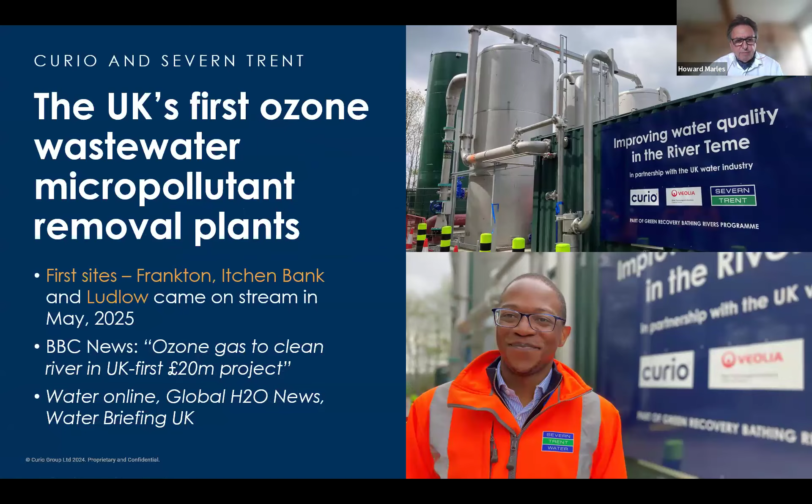More recently, there was an opening, or should I say a ribbon cutting, at Ludlow, where we were invited to attend, of course, and Wilf, who you can see from Severn Trent, gave an address. The BBC were involved, and basically it was more of a PR exercise to explain what Severn Trent have been doing and what we have been trying to achieve. So Severn Trent were pioneering.

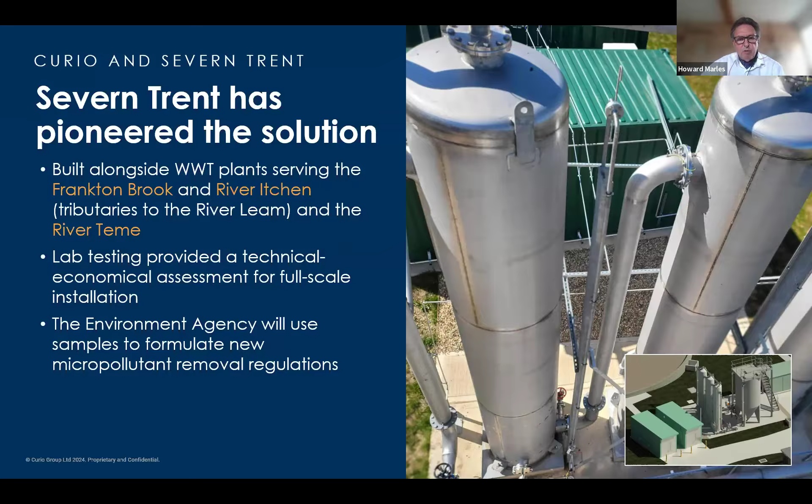When we talk about these plants, we're talking about them as a pilot plant, but in point of fact, they're actually testing the full flow. Full flow will go through these. Normally piloting will start with the lab test, as you can see on here, and then from there you would go into a more live project, probably 7 to 10 cubic meters an hour. So these are actually very large pilot plants. And we've already been told by the Environment Agency that they're interested in the results of what we can achieve in this removal process using ozone.

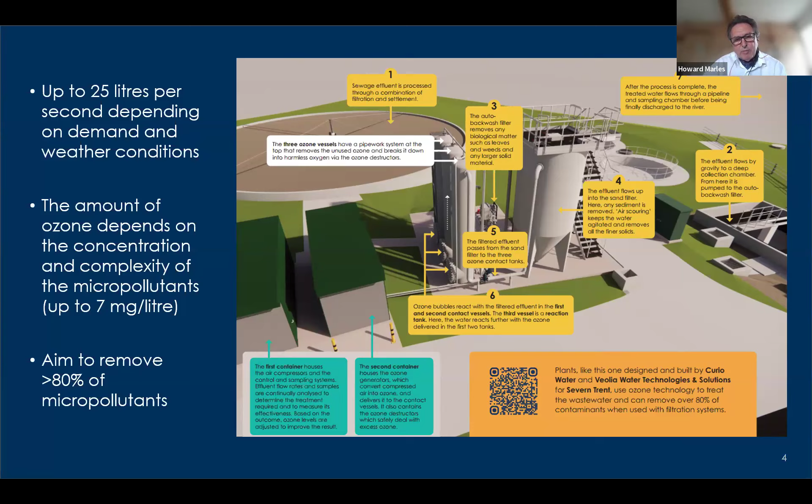So this is a very idiot's guide, as we call it, to the process that's happening. And this one actually is at Frankton, so you can see from the labels. We start with the effluent being processed all the way through the TSR plant, through the backwash filters, and then on through to the ozone, where the ozone is bubbled in. I'll talk about more of that as we go through this presentation, but that's not that unique just to Frankton, to be honest with you. Some won't have TSR plants, but this one actually does.

So I think the starting point has always been, where is the problem, what should we be addressing, and why has it come about?

So the green recovery was a directive from the government where they realized that over all this time we've actually polluted a lot of our rivers, and they're saying here that probably 90% of our rivers are polluted, not just with effluent, but with micropollutants, which we term the silent killer. They're the things you don't see. The sewage you see, this you don't see.

So Severn Trent engaged with ourselves, Curio and Veolia, to design and build the micropollutant plants, basically in line with what was happening in Europe, because we'd already had 8 years experience in Switzerland on similar systems.

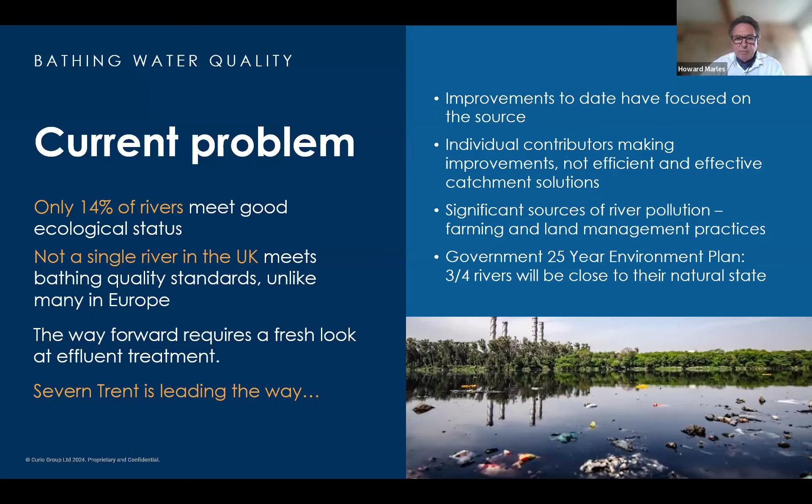So why is it important to have them? Well, a lot of these would be pretty obvious, although we perhaps don't discuss them enough. Healthy rivers support a really good ecosystem, biodiversity, communities, and the people are using them to swim, to boat, to fish. So healthy rivers for health and well-being.

During the pandemic, there was a really big issue where people were using the rivers for swimming and a lot more sports, and they were getting a lot of gastric problems. So the cost of having unhealthy rivers is really quite high.

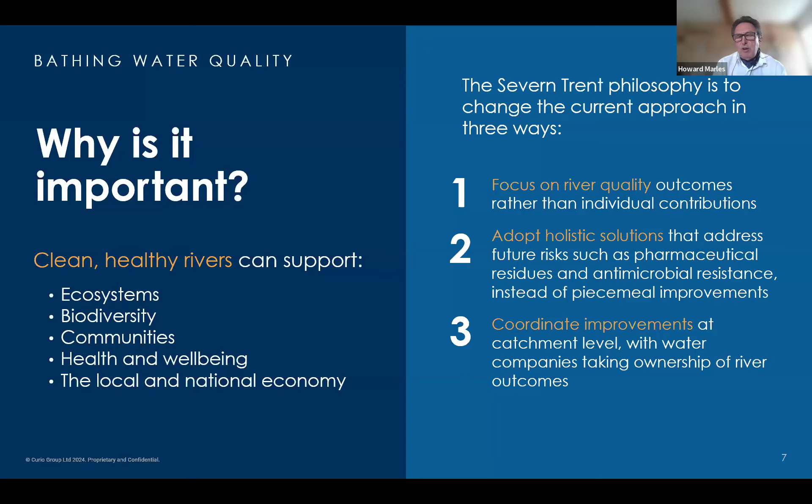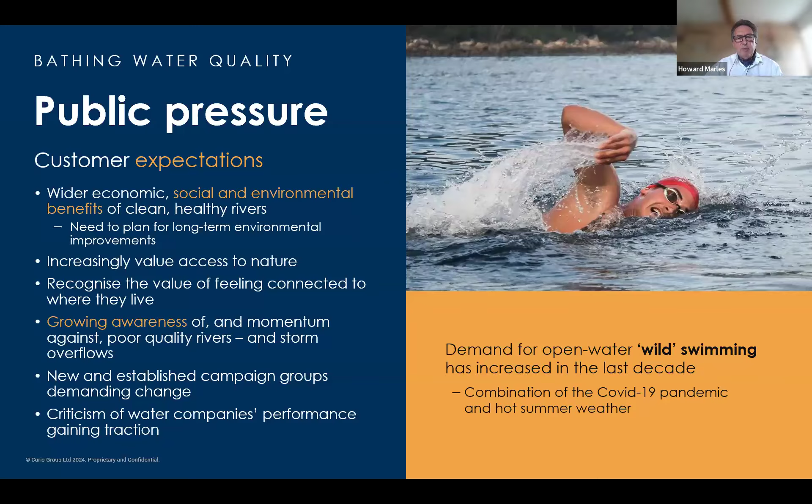So of course, public pressure now, and I think we're all fully aware. We as the water industry are in the news on quite a regular basis. The majority at the moment is to do with sewerage and the overspills and outspills, etc. But it's becoming more and more prevalent because it's in the news more. So the wider economic and social benefits of having clean rivers are now in the public eye, with growing awareness. So the demand is becoming more and more on the water companies to do something about it.

So bathing water quality. This is the directive that came out from the government. The objective was to have an investment program to deliver specific improvements to get our rivers back to a healthy state. Meeting the biological standards, improving against chemicals.

Now, when we say meeting the biological standards, there are no regulations in place currently for micropollutant removal. We do it with pesticides, we do it with nitrates, etc. So these rules, regulations and standards will be coming. They are definitely following Europe.

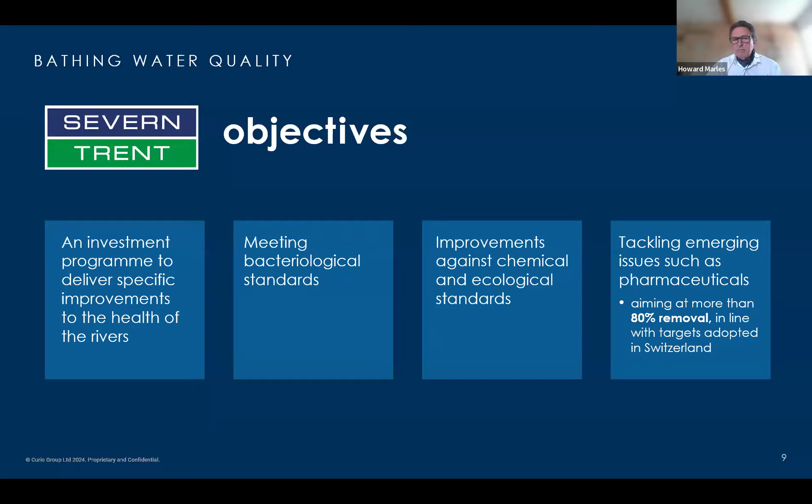So the objectives of these projects, right from the onset, were really micropollutant reduction and disinfection. To get to that point, we have to go through a design phase to understand what we need to do.

So we proposed a solution using ozone, which is diffused into the system. The reason we used ozone is because it's an absolutely brilliant oxidizing element to remove micropollutants. And there are no byproducts after this part of the process, because the ozone reverts back to oxygen, so we don't have residual traces going back into the rivers.

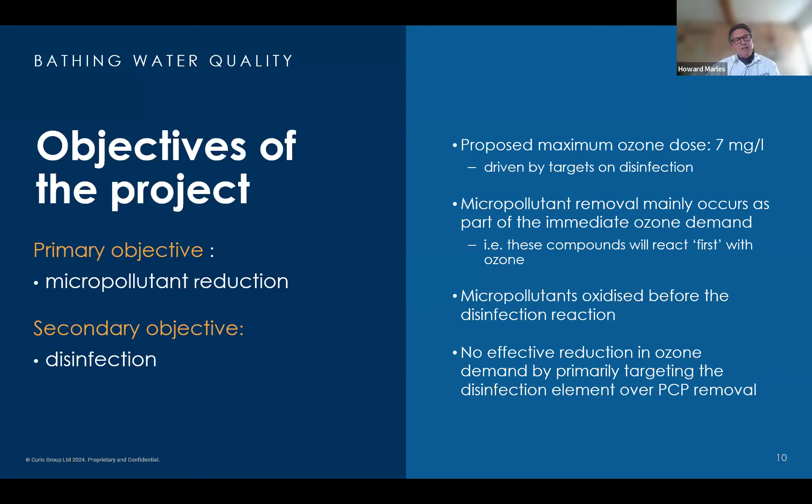So considerations we had to make: first of all, flow to be treated. We knew that Ludlow was in the region of 500 meters cubed an hour, Itchen Bank pretty much the same, and Frankton a lot lower at 7. So we were designing systems with quite a range of flows, and these are peak flows. As you'll probably be aware, there are extremities with bad weather flows, so we have a lot more than peaks to handle. And then there are times when we have quite low flows.

So taking that into account in the design was quite significant. And the properties of the water being treated. And then we had to ask, what would be the consent parameters? What do we target? How much are we going to remove? And what kind of systems do we need to design to take into account all of these different parameters? The calculation is on the right of the screen, so you see it was quite intense.

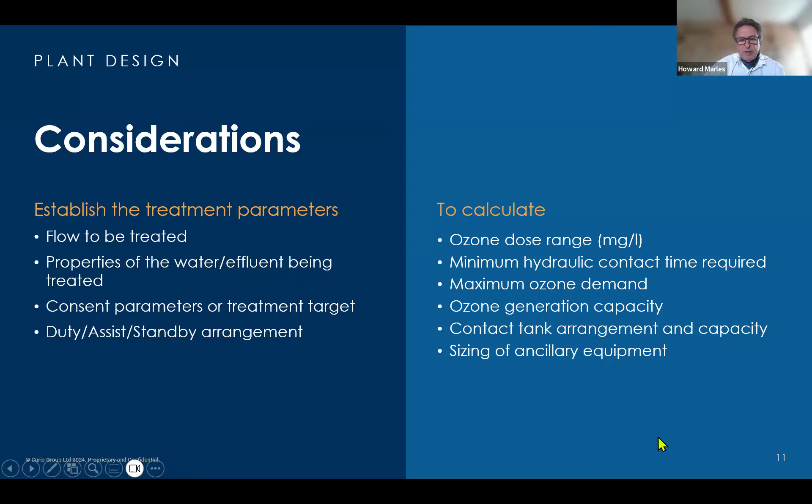Using ozone in wastewater, you're faced with a couple of issues. One of the main issues is if you have too high a concentration or dose of ozone, the risk of forming bromates is really quite high. So you have to design a system to try to mitigate that. So you need as low a dose as possible, but you need a dose adequate enough to do the job that you need it to do, the oxidization.

So the way that we designed this, or tried to mitigate this through our design, was to introduce the ozone at two different stages, and then to diffuse it in and to control the dosage, measuring at the beginning of the process and at the end of the process, so that you optimize the dosing points, but you mitigate the risk of forming bromates.

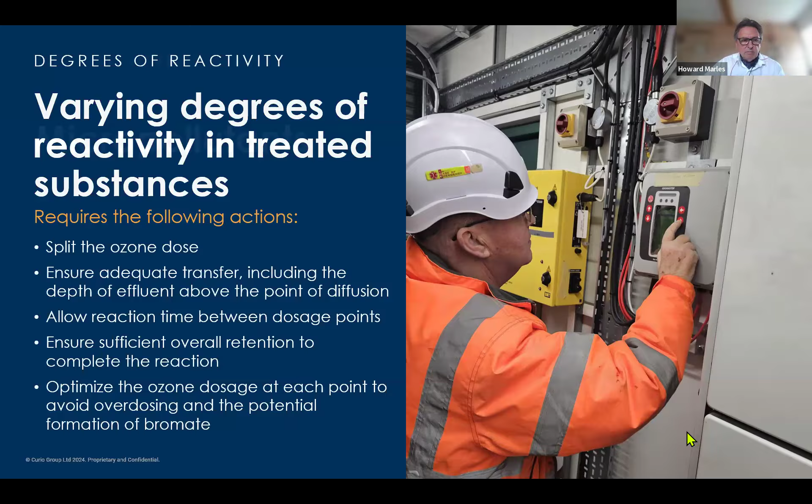So I guess it would be good to say a few things about micropollutants. What are they basically? So they're synthetic substances that originate from anthropogenic activities and appear in small concentrations, less than several micrograms per litre, in our natural waters. We get them from industrial chemicals, pesticides, pharmaceuticals, and hormones, which of course are domestic.

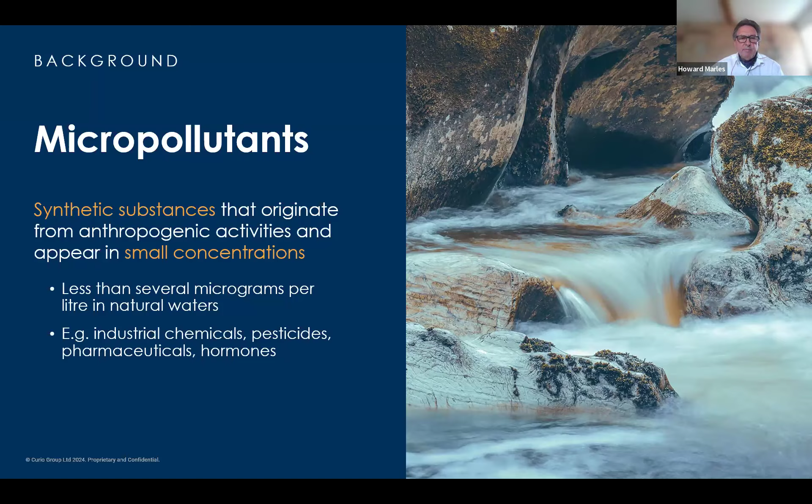I guess the problem we're going to be faced with is that, as of today, we understand the micropollutants that actually exist and need to be treated. But this is going to be a moving target. As we speak, we know already that more pharmaceuticals are being developed for people to have longer lives. So a lot of these contaminants actually are emerging concerns. So when we design anything, we have to design it to be future-proof.

So the starting point of this design was actually just using ozone. Since introducing the ozone systems that we have, other treatments are now going to become more useful, and we need to design them into this system. We'll talk about it in a little while in this presentation, the opportunities that are going to be available to us to not have one process, but to introduce several processes.

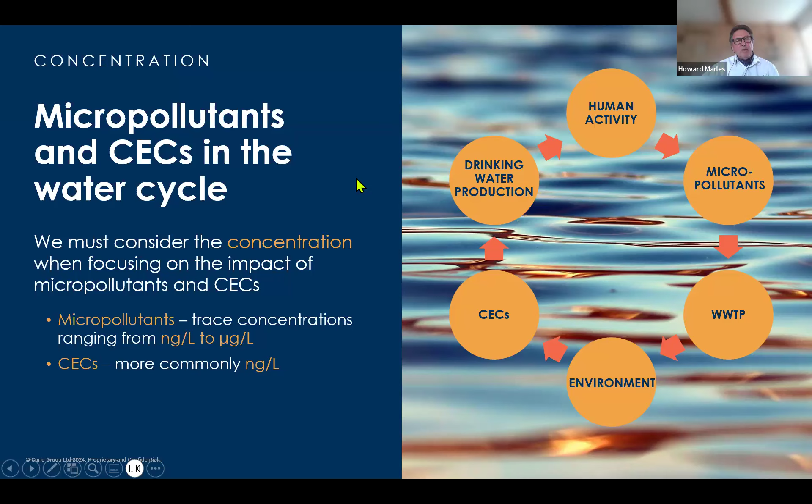I'm sure most of you are aware of this and the sources of them. We talk about micropollutants, but when you look at it at this level, there are 110,000 registered substances in Europe, which is a huge amount getting through to our wastewater system. And about 200 to 1,000 more are being identified each year. These are built up from chemical products, pharmaceuticals, cosmetic products, heavy metals. So they don't exist as one item. Designing systems to eradicate or remove these is quite a complex process.

So why use ozone? Ozone has been used in water treatment very widely for a number of years. In fact, we were building plants in the UK on drinking water some 20 years ago. They're great for killing algae, oxidization of micropollutants, oxidization of iron and manganese, which is quite a well-known process in drinking water. Bacterial disinfection, and it improves taste and odour. A lot of the water plants used it for colour and odour, colour in Scotland definitely, and odour in the north of England, and of course pesticide removal. So we have been dealing with micropollutants for some 20 years, because pesticides are a micropollutant.

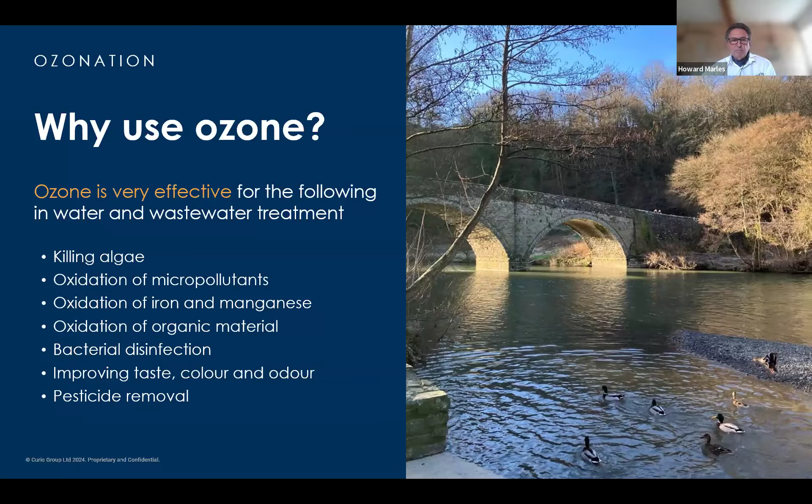So ozone and the reactivity of the micropollutants. It's the nature of the target compounds and the speed of reactivity with ozone. One of the issues we're faced with is that the suite of micropollutants we are trying to treat will all react at different times. Some will oxidize relatively quickly, some need a longer contact time, and then you've got some which are a bit more like the benzenes.

So we've got a bit of a technical issue, so hopefully Howard will join back again. He looked like he was taking his headphones off, so hopefully he'll be back very shortly.

Okay, I will get back to where Howard was. Let's see when he dials in. Let me just get the screen up and share from there. 1 second. This one should be it.

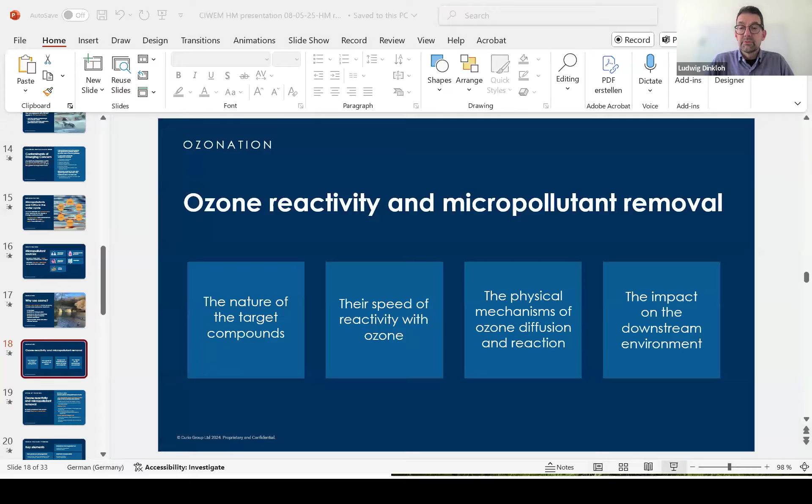Okay, I think we were here with the ozone reactivity and micropollutant removal, obviously with the cocktail mix.

Let me just move it over. What happened now? Andrew, I see you. What happened here? Let me just do that again. Sorry, now we have some issues. I can see your screen and I can hear your voice. Okay, good. There we are.

Since we have a cocktail, we need to look at the individual micropollutant contaminants regarding their speed of reactivity with ozone, then how we diffuse, how we get the ozone gas into the effluent, and how much reaction time we give to each component. And then there's obviously an impact to the downstream environment. What have we actually oxidized? How is that treated? So the overall ozone system approach is to be very carefully evaluated.

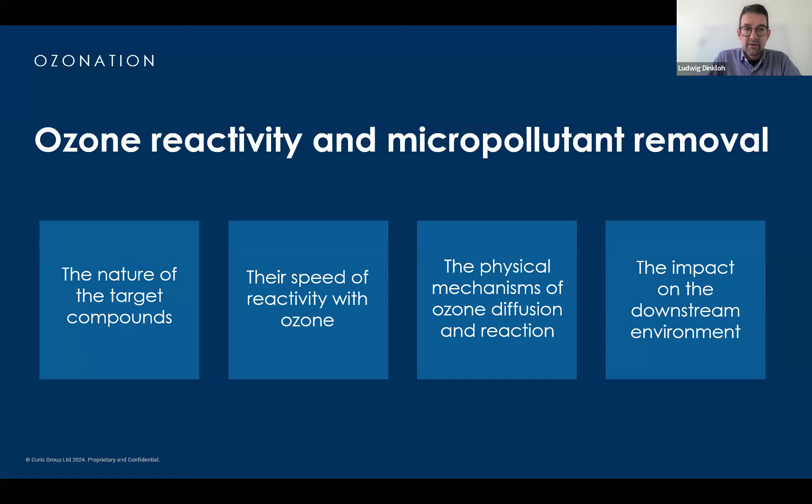And there are different means of injecting ozone into the effluents. We have very fast reaction time when we use very small bubbles, so that is fine bubble diffusion. But we introduce this against sufficient hydraulic head. So typically, as you have seen on the slides from Howard, we have large columns where we have a water layer of 5-6 meters.

Then the reaction time, how long are the micropollutants being exposed to ozone? We are talking minutes, not hours. And for some fast reacting components, we can even do that in seconds. But the typical reaction time, if it's ozone only as an oxidant, is in the range of 10 to 20 minutes. And obviously we have to look at the hydraulic depth again and the water pressure.

If we have slow reactions, then we have to make sure that the ozone is dissolved consistently in the effluent, and again have sufficient hydraulic retention time without dead legs, etc., in the reaction tank. So there are quite a few things to be taken care of when you look at the ozone treatment process.

Somewhere we need a gas containing oxygen, part of which is converted into ozone. Typically, it's LOX, liquid oxygen, or compressed air. If it is LOX, which is basically pure oxygen, you want to add a bit of nitrogen for the reaction, so the ozone generation is stable. The ozone itself is generated in a separate reactor outside of the effluent that is powered by electricity, so you need a power supply unit. The generation of ozone produces heat, which needs to be taken away, otherwise we lose the ozone again, so cooling water is needed, and obviously flow and pressure control.

Then once we have the ozone, and it's never 100% ozone, you're talking a percentage of ozone in the gas flow, let's say 10%. This 10% ozone containing gas, the rest being oxygen from the LOX tank, needs to be put into the contacting vessels, and we need a diffusion system. You can't guarantee that 100% of your ozone is consumed by the effluent, so you always need a safety measure for the excess ozone. That is an ozone destruct unit, so you need off-gas pipework and ozone destructors. And in the end, you need to control the whole thing.

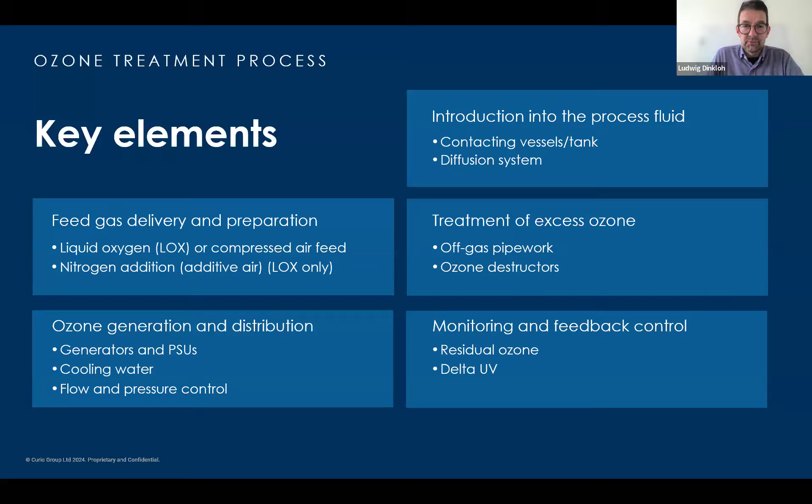How much ozone do we actually add, which is not just a matter of flow rate, but you want to measure residual ozone. And one interesting aspect that came out of the work in Europe is the measurement of the UV absorbance before and after the ozone addition, because the ozone attacks the double bonds, which are typically in the micropollutants, and that means with the delta of the UV absorbance, you can actually measure the performance and control the ozone amounts that you are putting in.

So here you can see graphically what I've described regarding the setup, which is also the setup for Severn Trent. We have the air inlet for the instrument air feed and the nitrogen addition. So air is added to the LOX tank, the oxygen feed gas, to provide the nitrogen amount needed for a stable reaction. We have the two generators here in violet, which also receive cooling water.

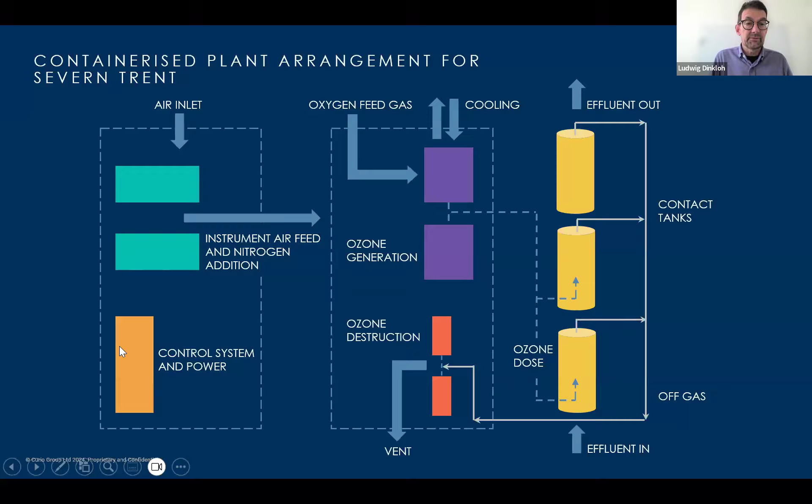From there, the ozone gas goes into the contact tanks. The off gas is collected from the contact tanks to be treated in the ozone destruction units in bright red, and the treated effluent goes out after its retention time passing through the contact tanks. And in orange, over to the left, there is the control system and power station.

So, well, okay, Howard here is not back yet, right? So I continue, because Howard, you can jump in any time, because I'm actually representing the partner of Curio, Veolia.

So that's really Howard's Curio story here more, because they've headquartered now in the Cranfield campus, where there are more trials going on with Cranfield University. And Curio actually will be putting up multiple pilots to test the combination of multiple micropollutant processes to be able to flexibly test subject to the requirements of the utilities and also to upcoming regulations that may be faced in the UK.

So ozone is obviously part of this one. There is granular activated carbon and powdered activated carbon, advanced oxidation with also UV, MBBR filtration. I will explain that also in full-scale plants a bit later. So this will be accompanied by laboratory scale trials, so that whoever wants to really test his or her effluent has a very good means to see what is the best combination regarding CAPEX and OPEX and carbon footprint for the particular effluent they want to test.

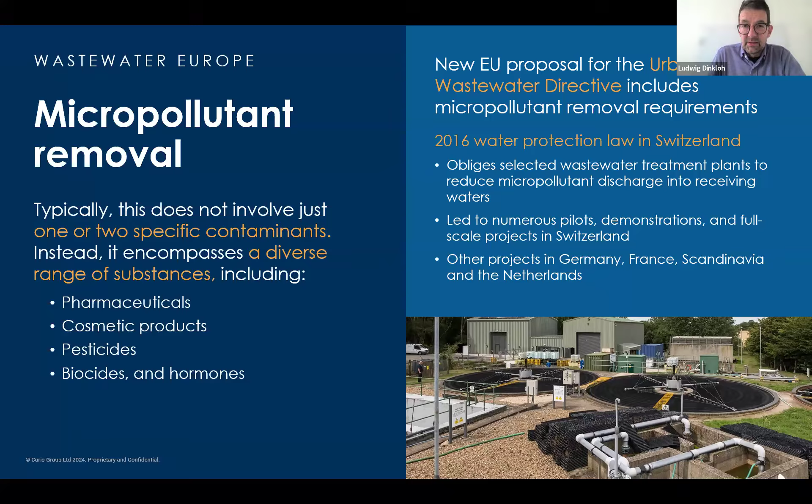From there, it has grown into Germany, France, Scandinavia, and the Netherlands, because it was clear that the European Union also will regulate this, and the Urban Wastewater Directive now requires micropollutant removal for European Union sites as well. This is shown on this slide, what that means. So the large plants, with a population equivalent of more than 150,000, will need to have this so-called fourth treatment step, 100% by the end of 2045, which is 20 years from now.

But as you can imagine, with all the planning cycles, investment cycles, etc., 20 years can quickly pass by, but it already has started. By 2033, 20% of the big plants need to have this fourth treatment step. The smaller plants, not all of them, but those that discharge into declared environments that would have a risk if it's untreated, so sensitive environments, there you also need to start treating, and that means also smaller plants will see the fourth treatment step.

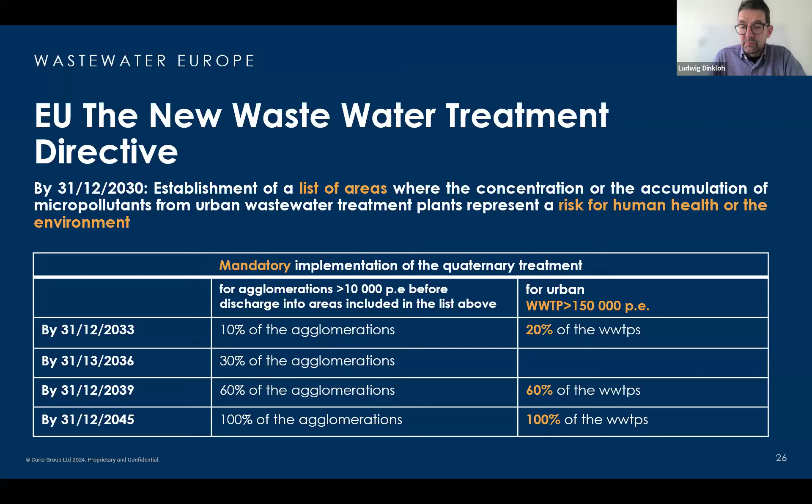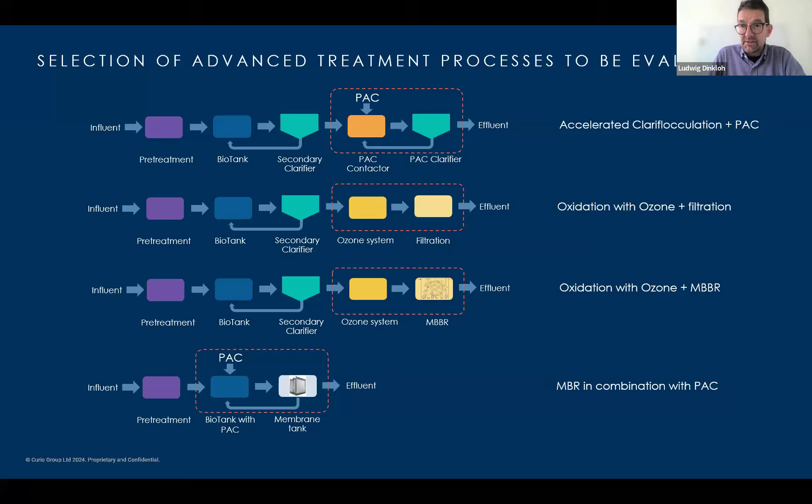And as you could see from the pilot setup from Curio, there are definitely a lot of different treatment processes. I will just highlight a few here. Let me just open this up. So you have, for example, powder activated carbon added as an adsorptive means. We can work with ozone plus a sand filter or an MBBR downstream. And if you go even further by upgrading your biology from conventional activated sludge or even older technologies, we work with an MBR system. One solution that has started to see full-scale operations is a PAC-MBR combination. I'll go into some details now in the next slides to give you a more technical overview.

So powder activated carbon can be added into a contact chamber where the secondary treated effluent is received. You obviously need to mix it there, and then afterwards you need to take the powder activated carbon out again. In this case, this would be with accelerated clariflocculation, where also a microsand is added for better settlement. So some kind of retainer. I also know plants which use cloth filtration; other things usually need to be added to make sure that the powder activated carbon, which has adsorbed the micropollutants, doesn't end up in the clarified water. Obviously, a constant add-on of PAC into the system, but a very simple operation after all.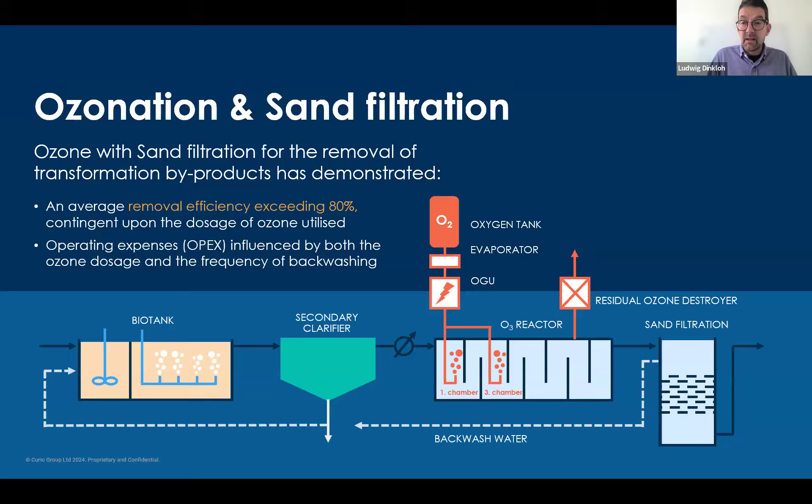That system is actually one of the most used ones in the oxidative mechanisms. Imagine the sand filter is replaced by a moving bed biofilm reactor, by an MBBR. Then actually you can get rid of the backwash water. So OPEX costs are being reduced, and typically an MBBR also has a smaller footprint than sand filtration. So that's quite a neat combination using ozone and MBBR.

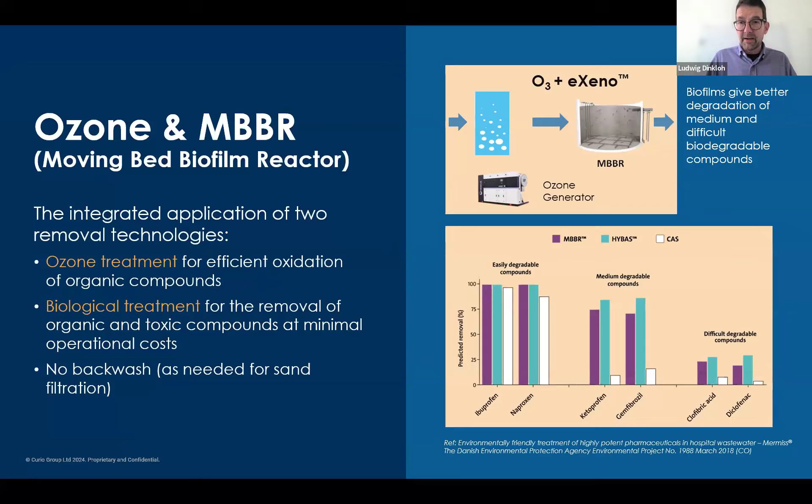Veolia has a trademark for their specific MBBR solution, with references in Central Europe on a combination with ozone. And this is no longer a filter, this is now a biological step, which even adds to some extent to the degradation of micropollutants, with the speciality of the microorganisms growing on the fixed film. Big aspect though, no backwash, and that means lower operating costs.

You could also replace the biological sand filtration or MBBR with a granular activated carbon filtration step. This schematic is maybe a bit misleading, because if you do ozone and activated carbon as a combination, you have two mechanisms that will treat micropollutants. You have the oxidative effect of ozone and the adsorptive effect of granular activated carbon, which means you can balance out how much ozone you really need. You will reduce the amount of ozone compared to a treatment with MBBR or sand filter by approximately 2/3. So you can really save on the ozone operating costs and ozone size.

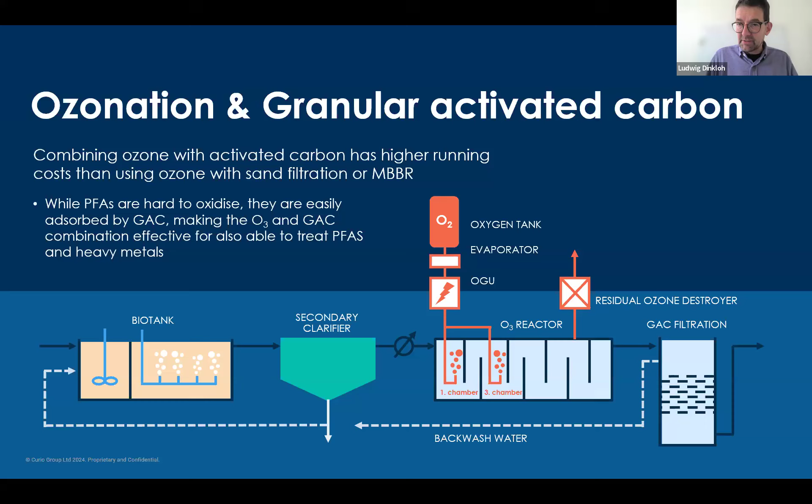You also can reduce the retention time a lot, because ozone would then only be used for the fast-acting compounds and partially oxidize, and GAC will do the polishing and adsorption of all the things that are not oxidized. There are some great references, especially in Switzerland. The GAC filter bed has survived now 60,000 bed volumes already. So I think 5 years of operation without GAC replacement due to the ozone add-on before. So it's actually quite an interesting combination. Obviously, GAC also has the capability of treating PFAS, and that means there's a bit more robustness in this combination.

Last but not least, and I think we have loads of time for Q&A, which hopefully has Howard back with us. A completely different approach, if you also want to upgrade your biological treatment step. So if for intensification, for further phosphate and nitrogen removal, you want to go to an MBR step, then what has already been tested and put into the field is a PAC MBR combination, because the MBR will act like a filter, and the powdered activated carbon will not end up in the effluent. So this is quite a compact concept. Obviously, it requires an MBR as the biological step, which will be subject to biological needs, not micropollutant needs, but a very interesting combination.

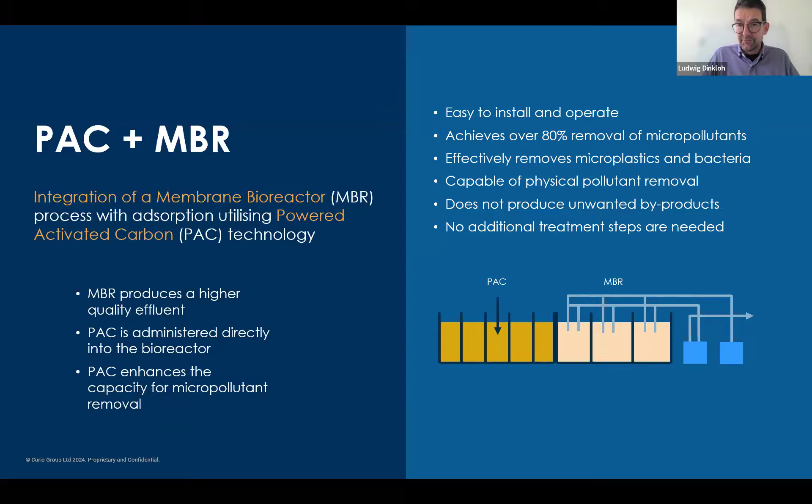By the way, ozone after MBR is also being tested right now, because the amount of ozone needed after MBR is obviously less than before a sand filter or MBBR. So again, we are reducing the amount of ozone. We are therefore also reducing the risk of byproduct formation. The most famous one is bromate, only happening at high bromide concentrations and high ozone dose rates. Whatever you can do to reduce the ozone dose rate, like MBR or activated carbon, helps to minimize that. But again, MBR means we want to upgrade the biology, and then we can think of a different concept for the micropollutants pathway.